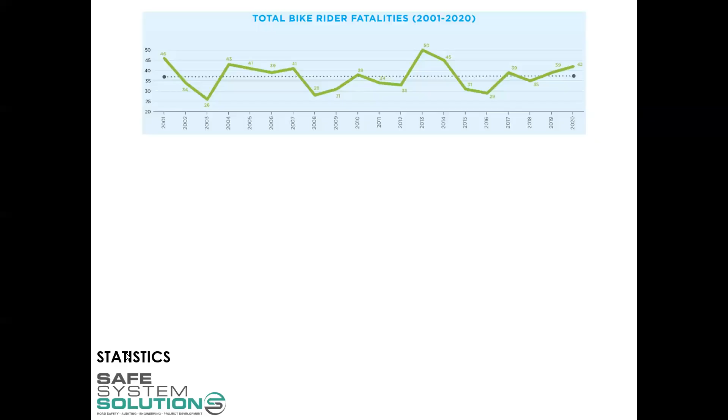Level of trauma. Thank you, Marissa. I'll just open up all of these.

So total cyclist fatalities in any given year. You can see it has been kind of up and down over the years, but more or less it's quite a solid, stagnant trend line there. We're not really seeing a decrease in the level of cyclist fatalities. Whereas if you look at our general road trauma, transport trauma in vehicles, we are seeing a decrease there. However, that's not extended to the cyclists. So that's one interesting takeaway. Oh yeah, I suppose that's kind of reiterated in that point there.

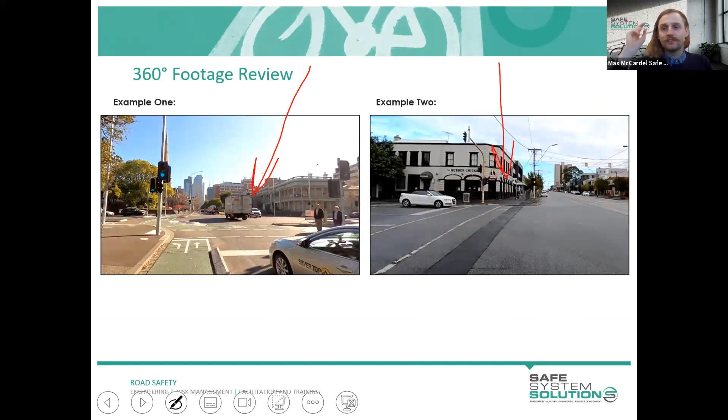Today's focus is all about roundabouts. So previously we just discussed intersections and we could have put roundabouts within the intersections, but thought it merited its own topic, so its own module. So today's discussion will all be about that. I should also make mention there's no Wally today. So if you're looking out for the wombat, there's no wombat today because we have another assignment instead of a quiz. For those who've already reviewed the footage from the previous module, we had the protected intersection there versus just a traditional signalized intersection. So encourage you to have a look if you haven't already done so.

Similar to last module's content, we will be going through protected roundabouts, having a chat about what that means, looking at some international examples, as well as Melbourne's protected roundabout. We'll go into the topic of multi-lane roundabouts and how to manage conflicts in those environments, as well as local network settings and implementing sharrows.

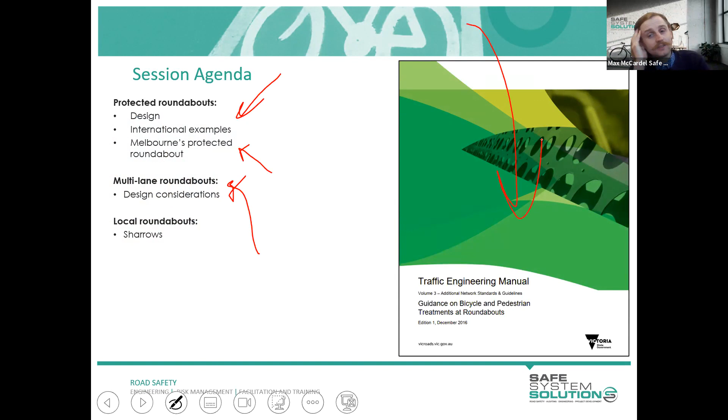The Victorian government released this document many years ago, but there's still lots of good content in there. Guidance on bicycle and pedestrian treatments at roundabouts. And also another really useful reference is the Austroads report, Bicycle Safety at Roundabouts. In my mind at least, whenever there's a really critical issue emerging or apparent, Austroads will release a report on that specific topic. So rather than just say cyclist safety in urban environments, it's cyclist safety at roundabouts, which I think speaks volumes to the risk level that occurs at these intersections. As always, please feel free to pop any questions in the chat.

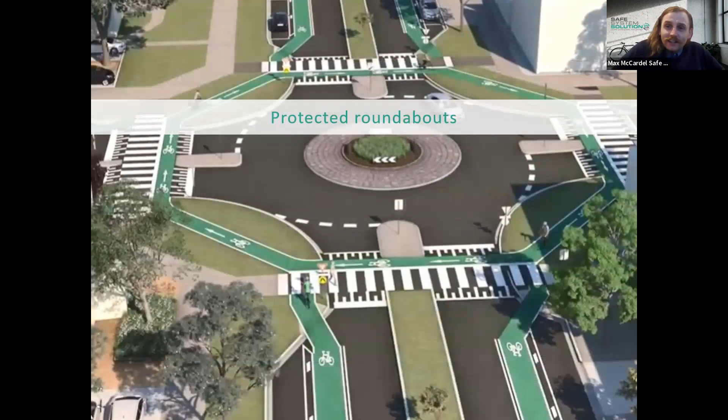Otherwise, I'll just keep chatting all day, but we will get stuck into a protected roundabout. This is an artistic rendition of what one looks like. This has since been constructed. This is in Moray Street, which we'll have a look at in more detail. But the thing you'll notice is, similar to our protected intersections, we've got an offset from where the left turning traffic is and where cyclists are crossing. So once again, you've opened up sight lines.

But traditionally, the way these roundabouts are constructed is we'd have cyclists entering the circulating area. And then they're either forced to claim the lane and sit in the middle, or there are designs out there which put them right on the periphery of a roundabout, which is a very bad outcome, not something that we want to be encouraging. If they are in the periphery, they become incredibly difficult to see, and there's just a really awkward confusion as to who gives who right of way. If a motorist is coming through and wants to exit here, there's that conflict, but does the cyclist slow down to give way to the exiting vehicle, or does the vehicle have to give way? So we don't like that peripheral design. But the protected roundabout is providing an off-road facility.

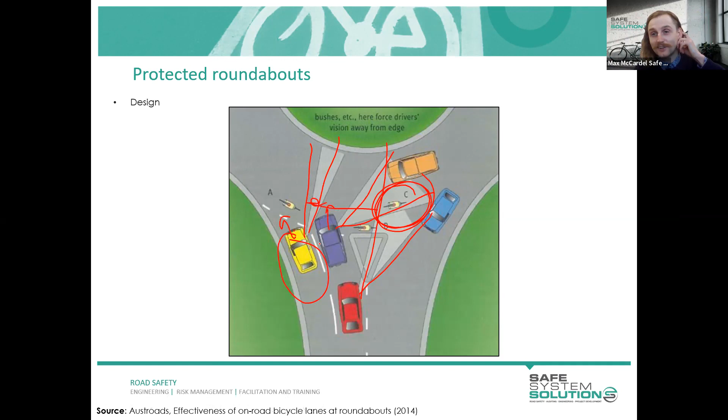So I would tend to agree that's a cyclist at risk, but I wouldn't discount any of those options because C at this point in time is completely hidden for the yellow vehicle. So it would be possible that the purple vehicle, as it's already heading out, the yellow vehicle assumes it's good to go and heads out as well, which means there's the collision waiting for that. So I have all these lines that are now occurring everywhere.

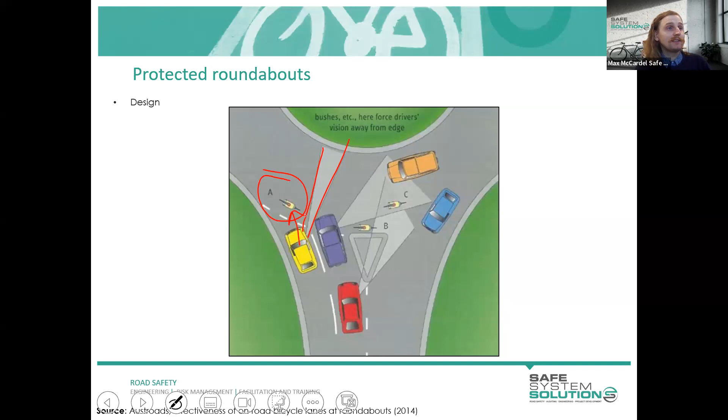Similarly, as I mentioned, this yellow vehicle, they're really focused to the right of them. They're worried about other vehicles already circulating in the roundabout. And it's possible for them to just head straight into the roundabout and not give way at all, so not necessarily focus on what's in front of them. So bit of a trick question, because I think all of the cyclists are at risk. So give yourself a pat on the back if you answered. I think they're all relevant responses.

I'll go back to the previous slide, just have a chat about give way marking at the exit points. And yes, you can kind of see the back of it there. There's give way, and there's also the symbolic pedestrian legs as well, just to further emphasize to motorists leaving that this is a pedestrian cyclist priority crossing. Good question.

All right. When we look at the actual crash types that are occurring within roundabouts, we find the most predominant crash type is an entering motor vehicle versus a cyclist that's already within the roundabout. So in this little diagram, the dotted green is a cyclist and the red is the vehicle. So it's basically this idea of a motorist coming up and giving way. They're stopped. Generally, the psychology behind it is when we are at a roundabout, we're looking for other cars, other vehicles, right?

We're not trained to look for the much smaller cyclist that may be traveling there. So that's another thing. It's this whole issue of looking but not seeing and not really appreciating what's really happening, because our eyes are just trained on the much larger metal body that is usually our biggest concern. So we have to make a conscious effort to actually look for cyclists, which can lead to these crashes 68% of the time. That's the crash type that's occurring.

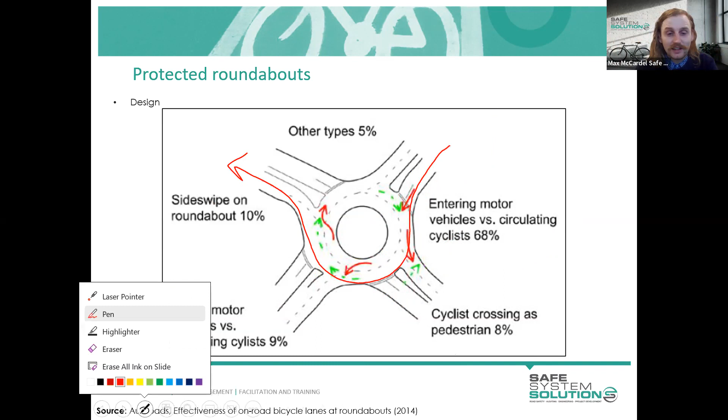analyzed. I say this because if you are a cyclist, get rid of some of these drawings, but if you are heading around and you want to just travel, let's say you want to do a right turn like this, and similar to that issue that I mentioned before, if a vehicle wants to follow you but hop off at this point, this conflict here is incredibly confusing as to who has priority.

Vehicles may assume that it's their network and they get right of way all the time, but it could also be an assumption of whoever gets there first. It's just a really awkward spot. And if you also couple that with the motorist kind of needs to make that decision about this point in time, which means they need to look over their shoulder to be able to see the cyclist behind them. And it's a very, very uncomfortable situation.

So I'm surprised to see that that's only 9%, but I think it's possible that this study was limited to single lane roundabouts and didn't focus on multi-lane. It also could just be the lack of reporting, and perhaps the crashes were not correctly classified from the start.

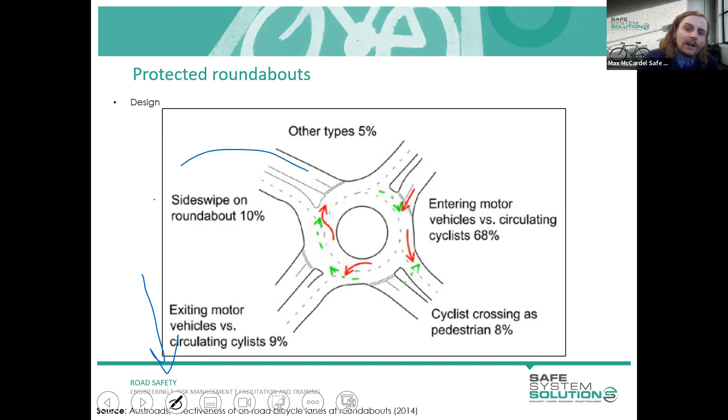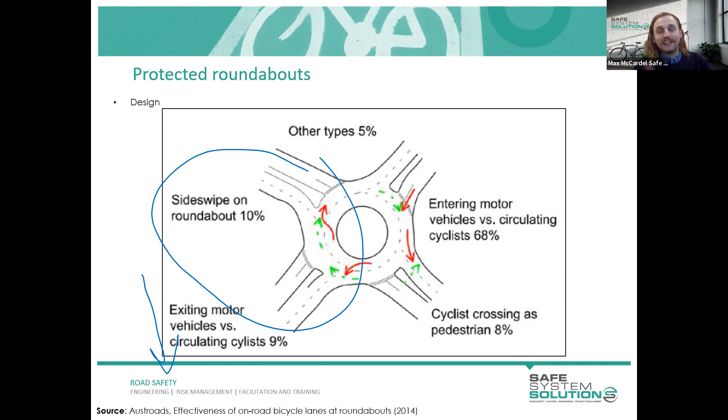The other one is just side swipe crashes within the roundabout itself. So other vehicles losing their lane, just hopping into the wrong lane by accident, things like that, moving across into the bicycle lane, causing a collision. Lots of different ways a collision can occur within roundabouts.

And generally, it's kind of understood that roundabouts do have a wonderful road safety benefit to general traffic. That does not extend to pedestrians and cyclists. So whilst it does work for some portion of the road user community, generally not as favourable for pedestrians and cyclists.

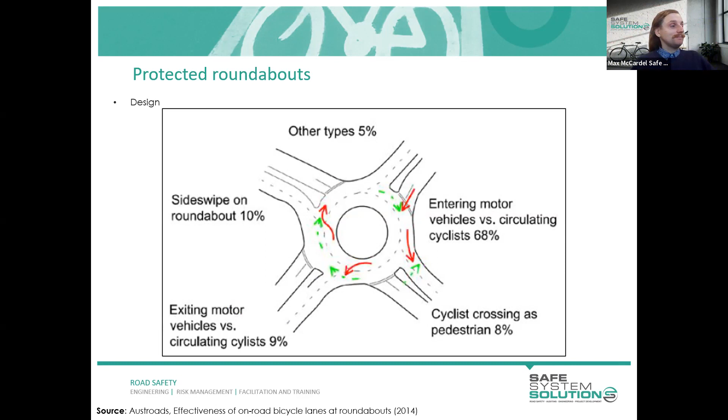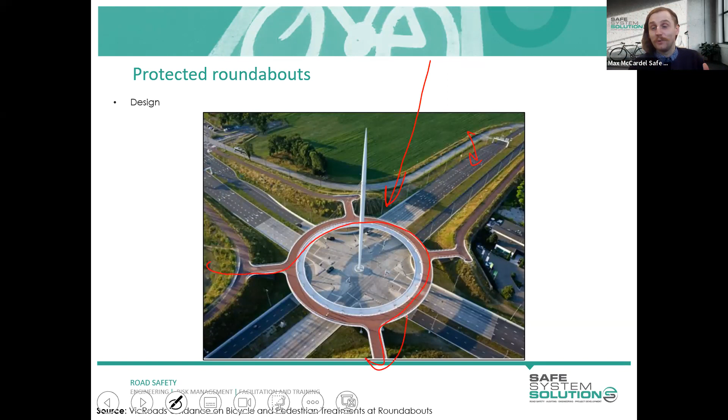So wonderful example. It's not a protected roundabout though. You just call that grade separation. Just something I wanted to show in case no one had seen that before. It's a really, really cool infrastructure treatment.

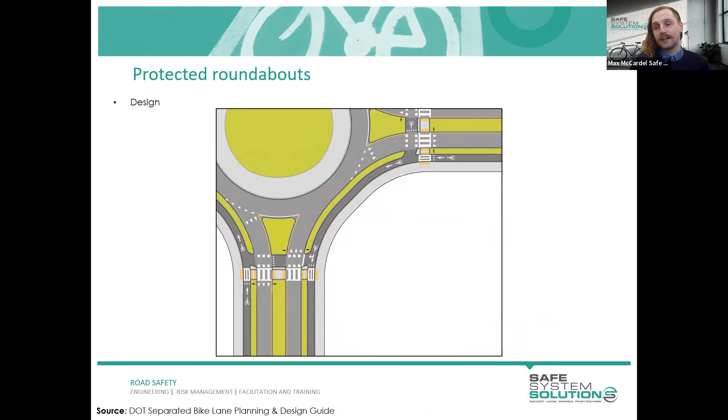A protected roundabout more looks like this, where, as mentioned before, we don't want to be encouraging cyclists to enter the circulating area. Instead, we provide a path that is off the road, separated from the road. So vehicles are traveling here, cyclists are traveling here, two separate traffic streams. Where they do cross over, it's best practice to make that a raised facility. So you are slowing down your vehicles and you're also providing priority to your vulnerable road users, which is your

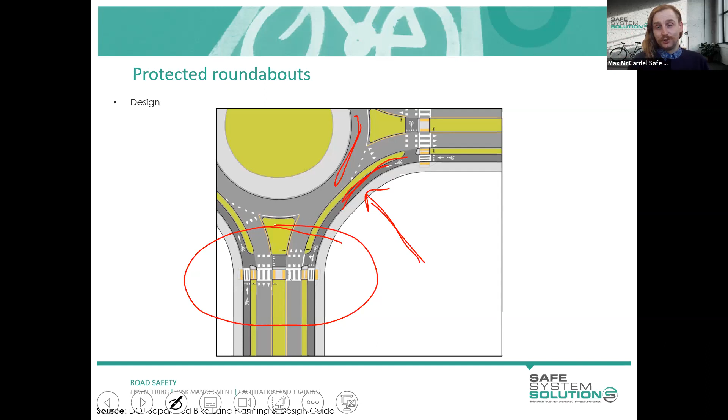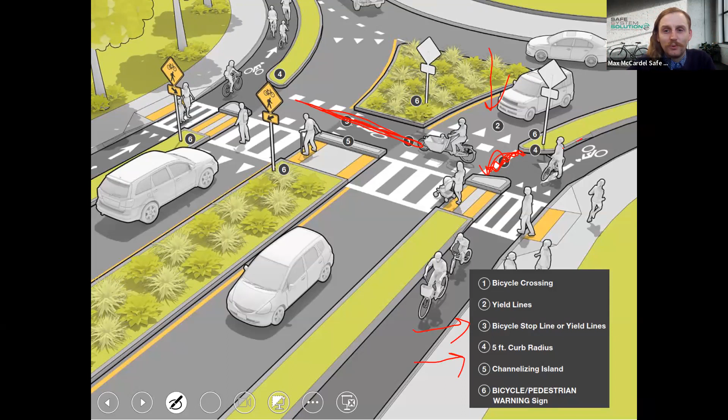We've got these yield lines or give way lines. Ours would look different within our jurisdictions, but just this idea that we need to show to traffic that they have to slow down and give way. Number 3, bicycle stop or yield lines. Yeah, this one is not applicable. This one is just confusing, so don't worry about that. Number 4, curb radius, just trying to get a nice sweeping bend for cyclists so they continue their journey.

Not incredibly relevant. Number 5, also not incredibly relevant. Channelizing, just providing some separation between pedestrians and cyclists. The risk of putting something like that in is you've just introduced a tripping hazard, or cyclists may run into that. So I wouldn't see that as a critical aspect of it. And finally, just some warning signs or give way signage in particular.

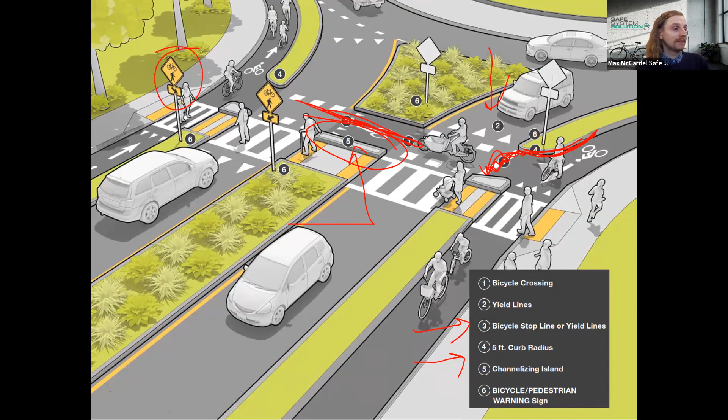There's a few different design approaches you could take with designing a protected roundabout. The first one I'm going to use is in Assen in the Netherlands, and this involves quite a significant footprint, as I'm sure you can see. But it's got all of those design features that we've just talked about.

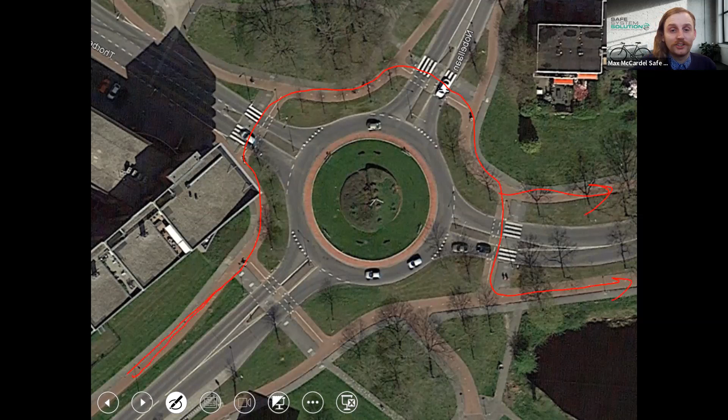So if I am a cyclist on the bottom left here and I wanted to turn right, there's actually two ways I can do this. I could go along here, like this, and continue my journey there, or on that side if that's where I wanted it. This is actually also bi-directional, so I could also do this, which obviously shortens my journey quite a bit. So that's pretty exciting.

But you'll see the reason that we're so encouraging of this type of design is we're not bringing cyclists into the circulating area. They have their own space completely. Whereas if this was the movement of a vehicle, they'd be forced to slow and give way to pedestrians and cyclists before they enter the roundabout, where again they slow and give way to any other motorists that may be within that roundabout. And then upon exit, they have to slow and give way one more time to any pedestrians and cyclists before completing their journey.

So already I can hear some of you who have worked with congestion or level of service for different transport modes understand that this slowing and stopping for general traffic could have implications for their expectations of the route. And I think that is completely valid. If you were implementing these treatments, you would see poorer performance for general traffic, as they will have to slow more often and give way to pedestrians and cyclists.

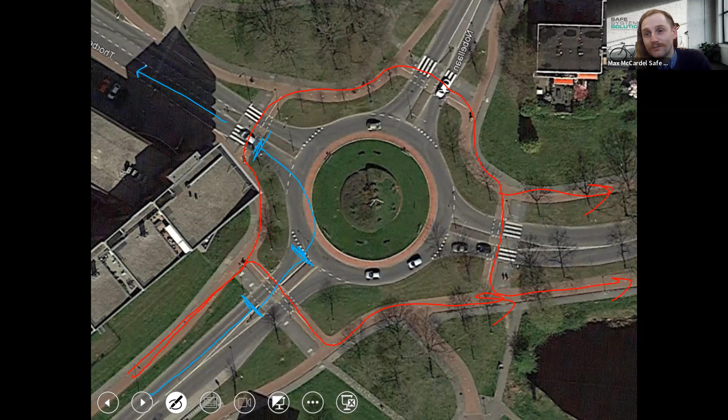But once again, if we are implementing treatments on our strategic cycling networks or our principal bike networks, the most significantly important routes within our network for the cycling community, we can't then let them down at the roundabout and just say that's a weak spot, you have to deal with it, because we won't be able to attract more and more people onto bicycles. Lots of people identify roundabouts as their least favorite part of cycling. They don't feel comfortable claiming the lane, or merging in with or being around traffic. So we need to keep in mind, if the objective is cycling safety, then that can come at the disadvantage of other road users like general traffic.

Here's how things look out on the ground. So as I mentioned, this is a type of design where you had quite a large footprint and you were able to provide quite an offset between your crossing points and the circulating area.

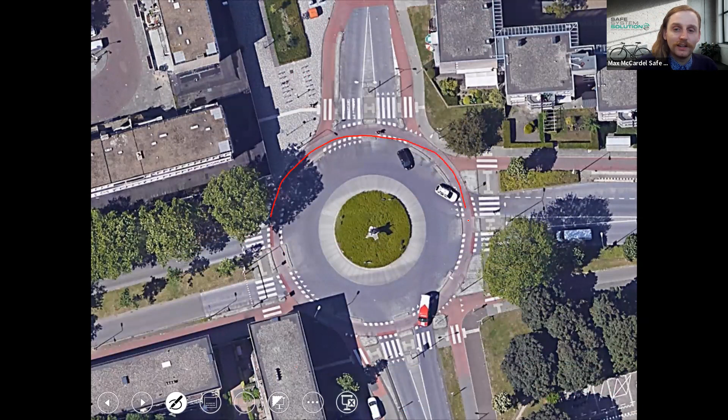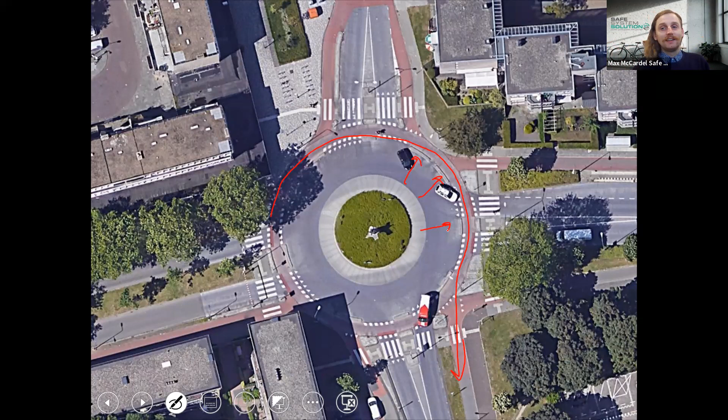I think it might show how it looks out on the ground, so you've got a bit of appreciation. And I might even bring in a vehicle so we can see how things will look. Here's our little Porsche driver coming in. I'm not sure why I picked the Porsche, I've got nothing against Porsches, but say this Porsche wanted to exit the roundabout, head out here.

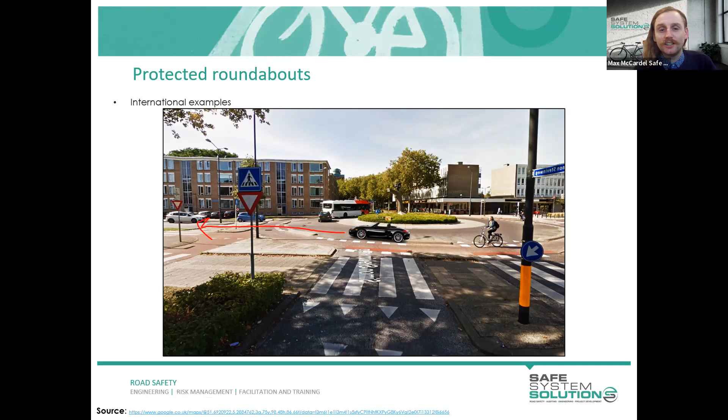Because we don't have the same offset that we had in the previous design, it's actually very difficult for that driver to see the cyclist that's behind them, because this cyclist is also traveling in this motion, and perhaps they want to travel over there. So it's difficult for that driver to safely acknowledge the presence of any cyclists and stop and give way for them. So where it gets tighter and tighter to the periphery of the roundabout, you're increasing the risk of drivers being unable to see cyclists and therefore increasing the risk of collision.

Any questions there, Marissa?

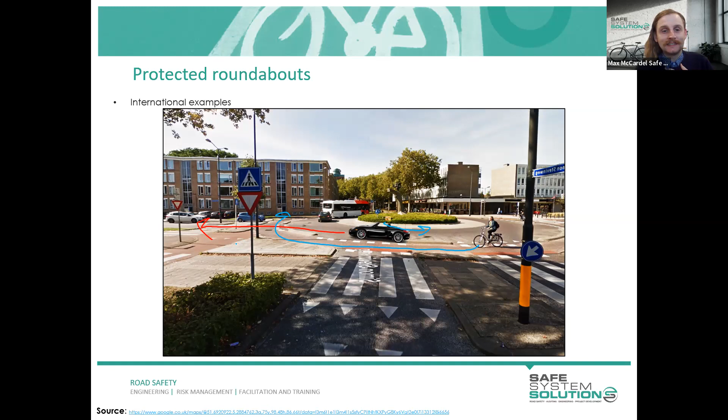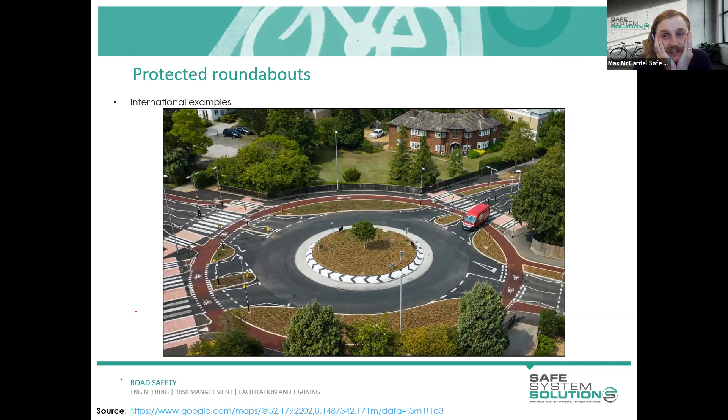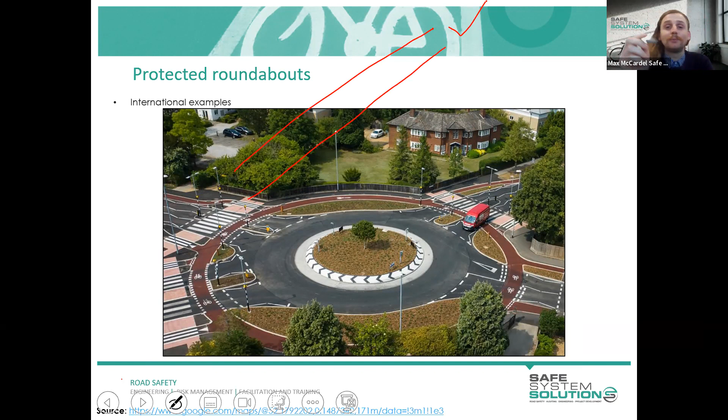We do have a question, Max. What if there is an SCC intersecting with a priority traffic route or priority bus route? Ooh, okay. So that's a perfect example where you have competing demands. If you were just looking at the SCC, the Strategic Cycling Corridor, you'd say, yeah, I can do gold standard along there because that's the strategic objective of that corridor. And we recognize that at a local level, at a state level, it's really important to get cyclists traveling through there safely and make it as attractive as possible. But that could be crossing over an arterial road where it's really important for people and heavy vehicles to move through.

Depending on the size and capacity of that movement corridor, you could be looking at grade separation. I would say that would be a really good outcome for cyclists. In our jurisdictions grade separation is few and far between, but in these European nations that I keep showing, that's exactly what they would do. There's no question about it. They would never accept the risk of cyclists crossing these major arterials. Even with signalized intersections, they'd be much more likely just to provide grade separation. But it needs to be considered case by case. I can't provide a blanket response because you can't build overpasses at every single intersection either. So it's a good question.

Keep them coming. Thanks, Max. And just further to that, do you support separation in those situations? Depending on how it's been designed, yes, I think it can work, but if it's not going to be comfortable for the cyclist community to use, then they won't use it. They'll find ways around it. They'll go whatever is more attractive for them. So think of things like steep grades and the facility itself, whether there's enough width, whether the handrails are going to create snagging risks and things like that.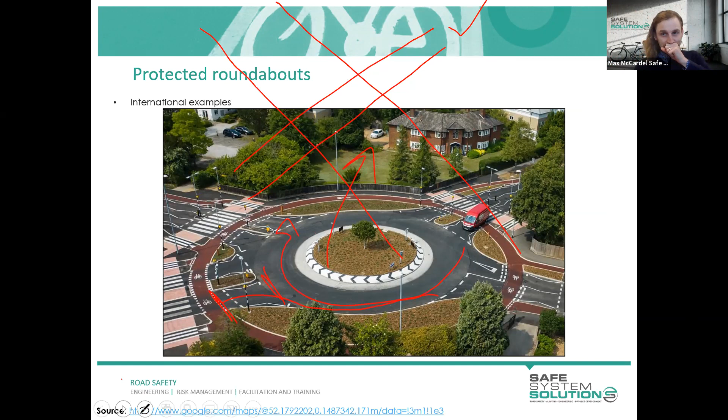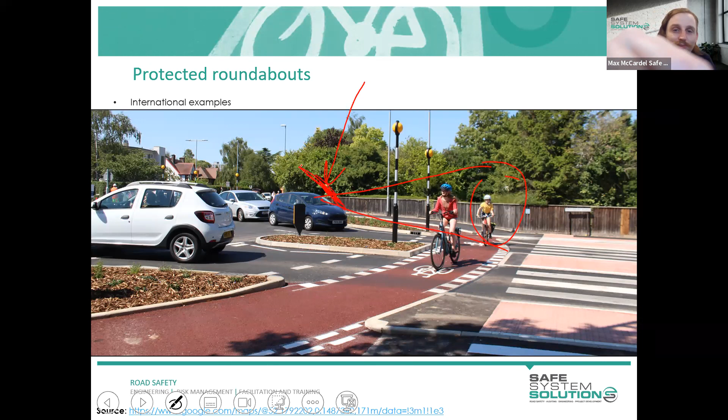It's actually perfectly illustrated in this diagram here, but you can see in that photo, hopefully that's a bit clearer, how the driver would be in a much better position to see cyclists crossing over in front of them, as opposed to if the cyclist was creeping up right behind them in that awkward position. So the bigger the offset you can apply there, the more positive the outcome will likely be.

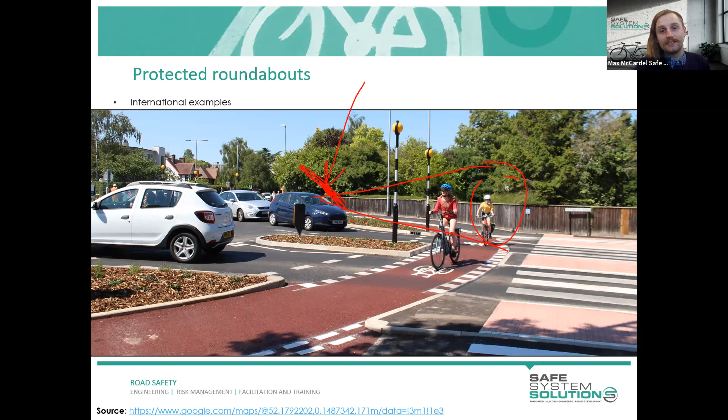I should also caveat that with, if you push the offset too far away, two things might happen. You might get cyclists that don't want to travel that extra distance to then cross over, so cyclists may pick their own path. The other thing is, if you put the crossing point too far away, as motorists exit, they build up speed, and they'll be less likely to then slow and give way again for crossing pedestrians. So there really is a bit of a mix and match of exactly the perfect length that you would be aiming for. Don't want it too close, don't want it too far.

Generally, one parked vehicle is being considered what should be strived for, so like 6 meters or something like that. But yeah, just something else to consider.

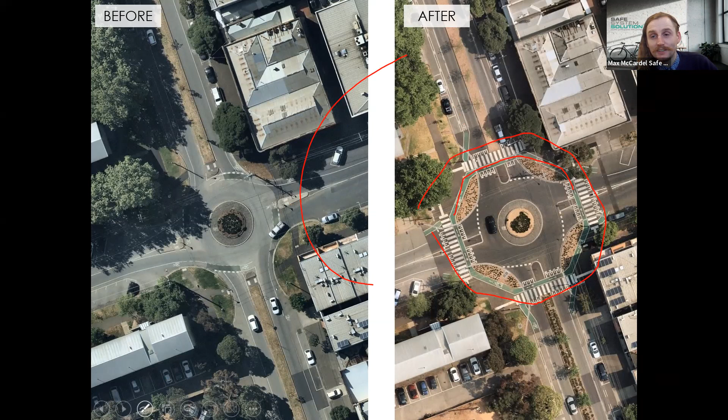Some people don't like the shape as a cyclist because you've got these sharp-ish bends where, if you are a cyclist, you do like sweeping bends just to be able to maintain speed. Personally, not that big of a deal. I think it's fine. It's not like you have to slow down to a walking pace to be able to navigate that, but you do have to slow down, which I don't think is necessarily a bad thing. I might just go to the next slide because it's a bigger picture.

The other interesting thing about this site that I mentioned in the protected intersections as well is whenever the cycle path crosses over the ped path, you can see the zebra crossing is extended. Yeah, that one's under the tree. So in other words, if you're a pedestrian coming along, your priority starts at the bicycle path. So cyclists are forced to slow and give way to you. And once again, just to reiterate, it's a lot easier to communicate that to road users than to have it the other way around of pedestrians needing to give way to cyclists within this area. So I think that's a really sensible idea.

Really good feature within this design, not shown in the others, is the raised nature of the crossing points as well. So building wombat crossings. The raised feature slows down vehicles, so it ensures that they are traveling at speeds where they're more likely to be able to stop for emergencies if someone does cross in front of them. And also, if a collision were to occur, it's much more likely that the severity of that crash outcome would be survivable. So making them raised is just another really well thought out, Safe System aligned feature as well.

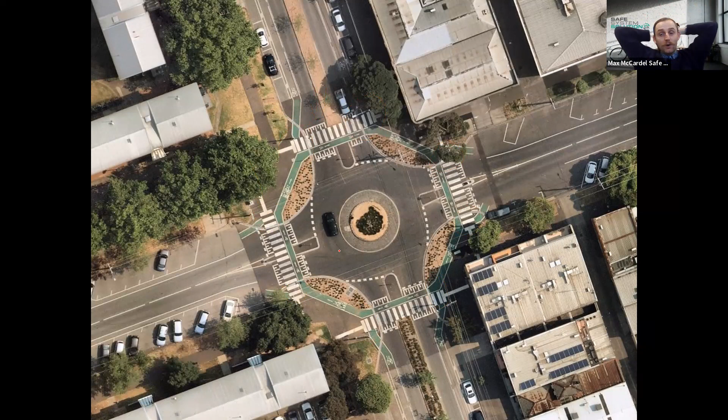I did have a question for the group about this one, which is, could you think of any disadvantages for cyclists at this particular roundabout, or at the other roundabouts as well? But because I've got this photo up, I'll just talk to this one. Any disadvantages? So I've talked about all the wonderful safety benefits. So maybe this one isn't safety related, but could you think of any disadvantages for a cyclist at the roundabout?

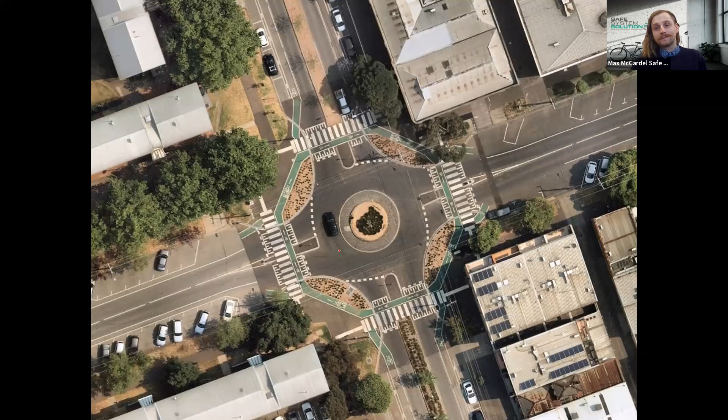We have a couple comments, Max, while people are popping in their answers there. Noticed a lot less vehicular movement. Oh, it's a tongue twister, that one. As opposed to bikes and pedestrians on the video that you showed there. Yeah, true. And Chris says they go to the trouble of building a nice roundabout but leave a dooring risk on the approaches. Yeah, that's right. Dooring. Not reverse dooring, but reversing out into a bicycle lane. That's very risky as well. But yeah, very relevant.

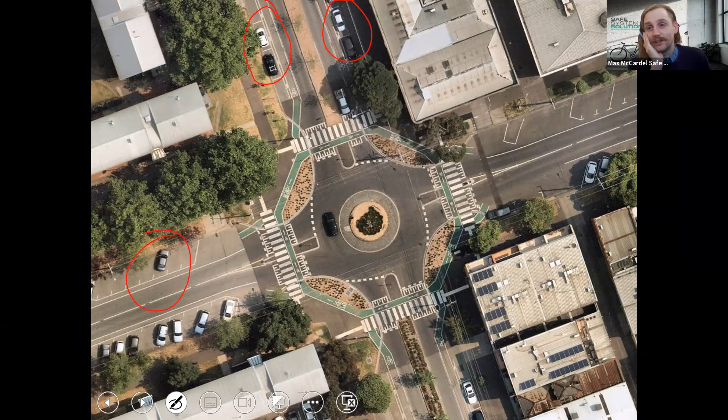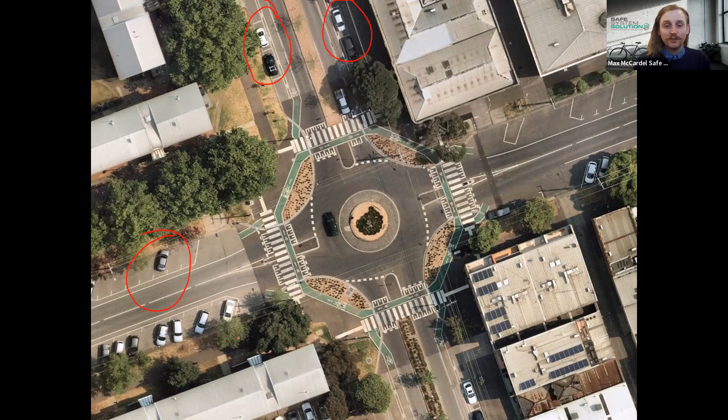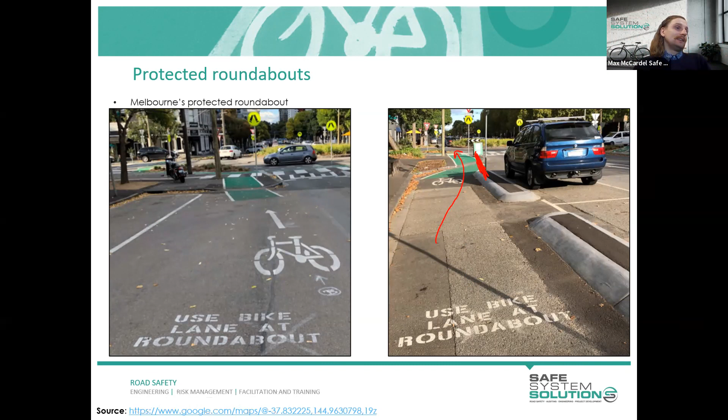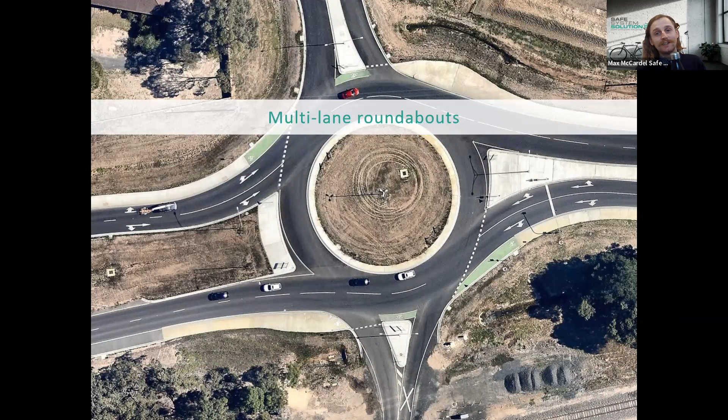All right, multi-lane roundabouts. Things get a little bit trickier in these environments. I'll move that little banner out of the way. This is in a rural environment. It's coming into a relatively big township. And as you can see, the main thoroughfare, which is east-west, has got bicycle lanes, but nothing for the north-south legs. So there's no north-south connection there.

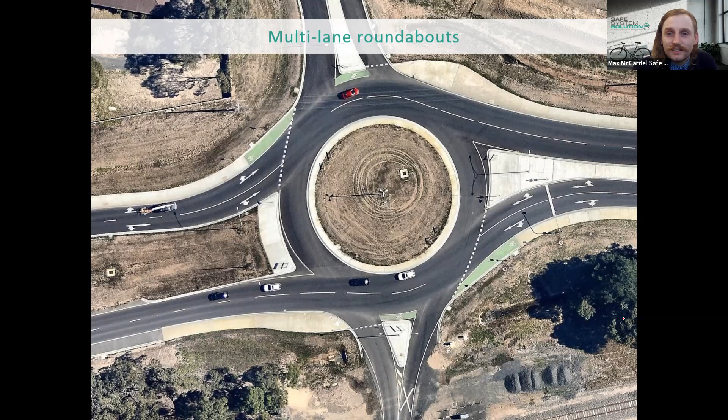The original idea with this roundabout was if you did want to turn right, they provided this space off-road here to be able to pause and wait and then cross over. However, it wasn't fully realized as there's no curb ramps there. So that's all just splitter islands. So you'd have to actually mount the curb again, which is obviously not a great outcome.

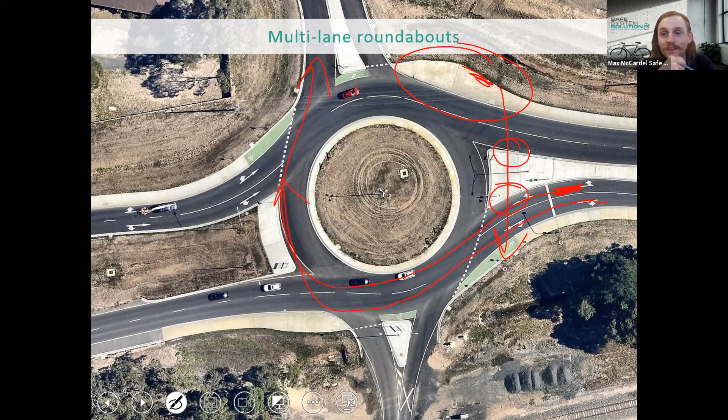So it's really not encouraging cyclists to turn right at all, which means cyclists that do want to perform that may be forced to put themselves in this position here and get in the right lane and travel like a vehicle in this high-speed environment, or in a much worse outcome, use the periphery and cut across that way, which would be, as you could imagine, quite a stressful thing to be doing as a cyclist. So this is not a very good example of what to do in multi-lane roundabouts.

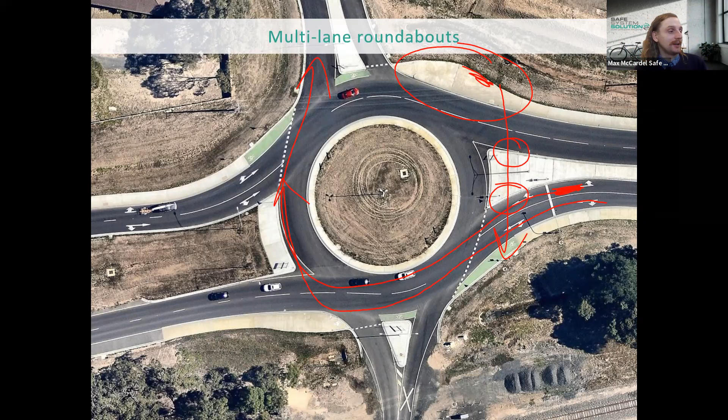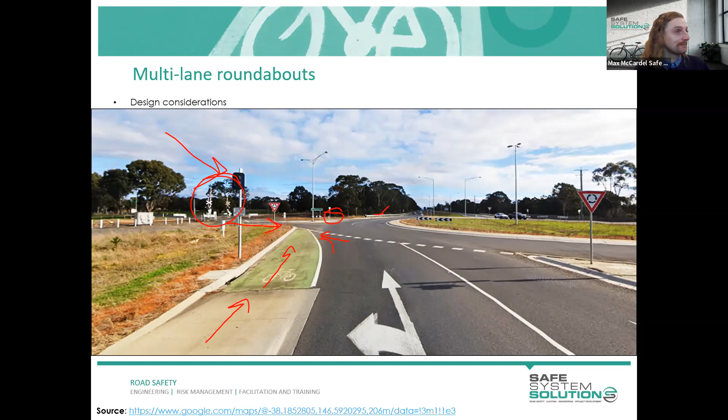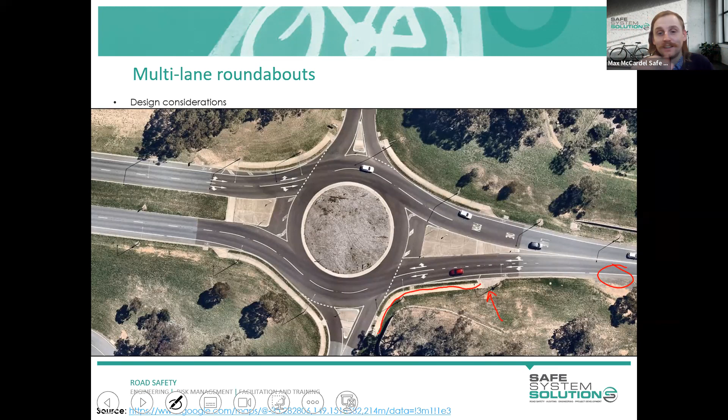There's some hold rails and things like that. They don't have priority to cross here. They have to wait, give way to traffic, cross over. And if they wanted to do that again, they could cross over here and then continue their journey up there. But this idea of physical separation in multi-lane roundabouts is absolutely key. It's critical. It's a must.

So in the local environments, we're a little bit more flexible. We can even have cyclists riding in the middle of a roundabout through the use of sharrows and encourage them into the circulating area. But for multi-lane roundabouts with higher speeds, it's not a feasible solution. We really want to be providing these off-road facilities.

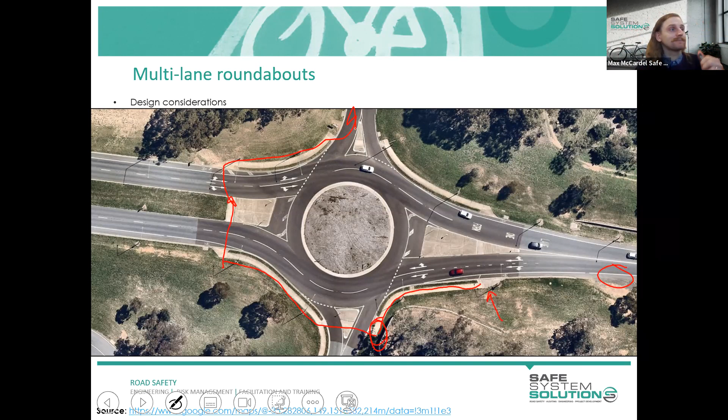Here's how this looks out on the ground. So you can see cyclists, once again, you could interpret that as being corralled into that off-road facility, but it doesn't necessarily exclude a cyclist who does feel more comfortable to claim the lane and head right.

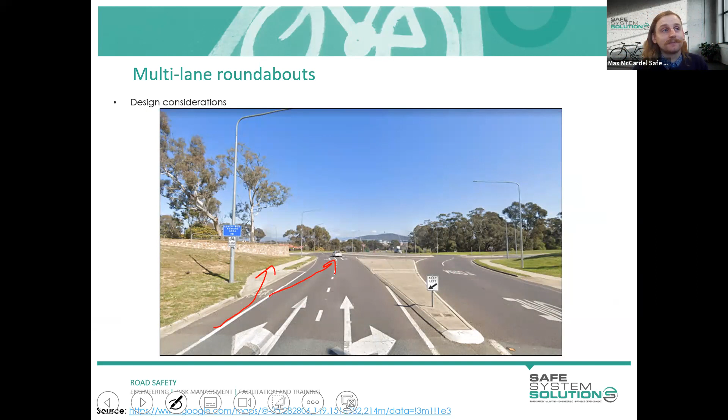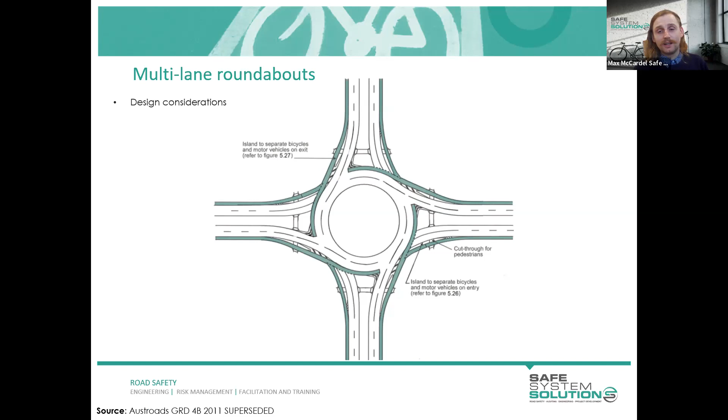For those that have worked within this space, you may have come across these designs before, which propose to put a bicycle lane on the periphery, something that I've been saying not to do this whole time, and that has been superseded. So if you are still referring to that, make sure you're going to the Austroads Guides, Road Design Part 4B, and having a look at what they currently recommend, because what they're currently recommending is let's get cyclists off-road and provide the hold rails, and they can cross when they have the time to do so.

Here's an example of how a design may be influenced by the network that you are crossing. So in this example, the east-west road is, let's just say, a highway. It's quite a high movement corridor. It's quite important. Whereas the north-south is more local. Could just be residential access or access to developer land kind of thing. So they're all off-road facilities for cycling, but I want to focus on the actual crossing points.

So we have a look at the northern side. We acknowledge this is a local network and the movement of vehicles is not really that important at a strategic level, so at a statewide level. So what we're going to do is provide priority to cyclists. So if you are a vehicle that's turning left into this development, you have to slow down, give way to cyclists and pedestrians, and then continue on your way. Similarly, if you're exiting.

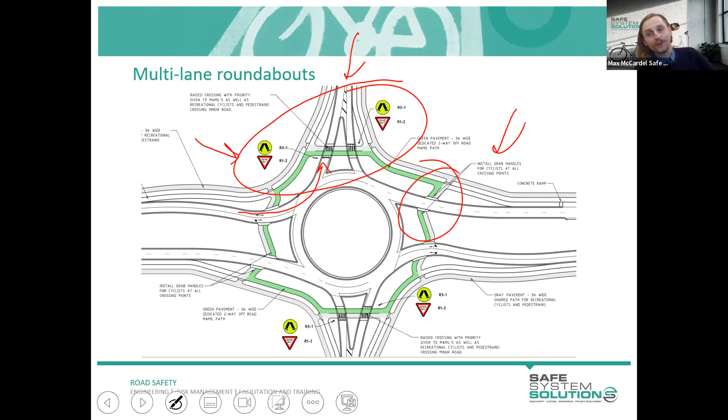That design approach has changed for the much more important highway. It's much more important to keep general traffic movement here. So instead, we're going to install grab rails or hold rails for cyclists at all crossing points. So we're still maintaining the priority for general traffic on that movement function corridor and making cyclists give way. So it's an example of where your design may be dependent on what the road network strategic objectives are for each of the corridors that you're crossing over. Pretty neat little example.

Lots of great answers coming through there, Max. Thank you, Marissa. Yes. All right, let's have a look.

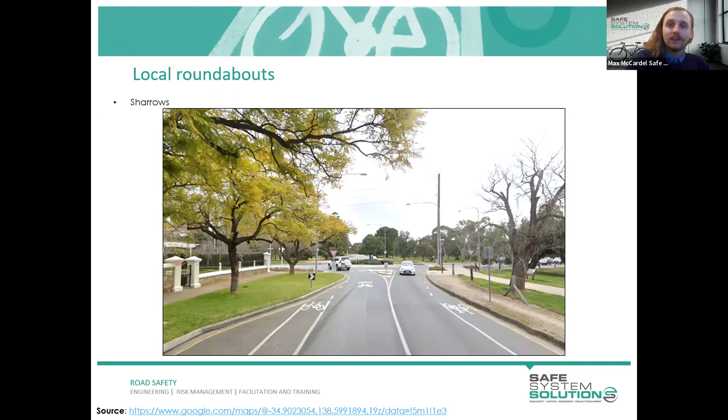So here's an example of how the sharrows could be implemented in these local environments. As you remember before, when we are mixing traffic, we want to be in the 30 to 40 kilometre per hour range. So in a lot of our networks where we have these, we may be looking at reducing our speeds just to accommodate cyclists safely claiming the traffic lane, which I'm not against. I think that would be a good outcome for cyclists and general road users as well.

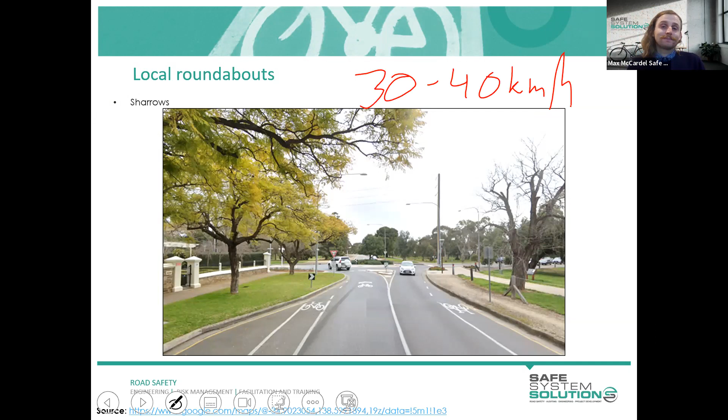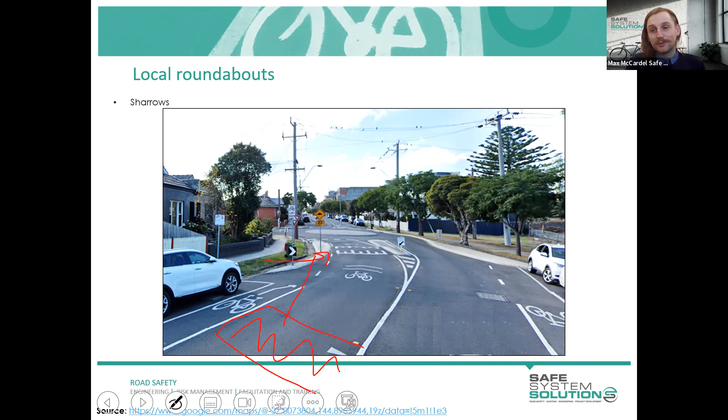So the sharrows are used quite commonly, depending on what jurisdiction you are in. This particular example I wanted to share because I think it's much better practice if we are to install vertical deflection for the speed hump. If we can move that back to before the merge point, so vehicles come up, they hit the speed hump, they slow down, and then cyclists are merging in front of them, much, much better outcome, as opposed to cyclists just merging and then everyone has to slow down.

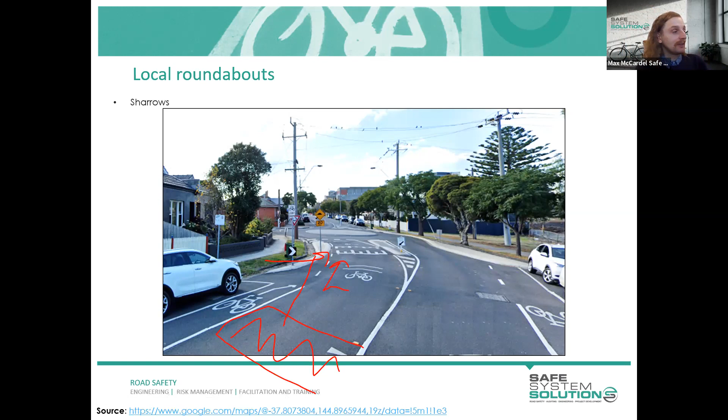Because you don't really need the cyclists to be slowing down at that point. They're likely already traveling at lower speeds approaching the roundabout. So that would be something to take on board if you are working within local area or local governments. Another similar example of just the local area traffic management treatment being applied and lots of sharrows. But yeah, just to reiterate, low speeds, low traffic volumes. Generally, we're considering it appropriate to be installing sharrows, including within the roundabout itself.

So you can put the sharrow symbols all the way through the middle of the roundabout as well, just to really emphasize that this is an area to be shared and it's not just for general traffic. Right. That is the content for the roundabouts, but I've still got a few more slides to go through, and I also want to run through the assignment. So keep the questions coming.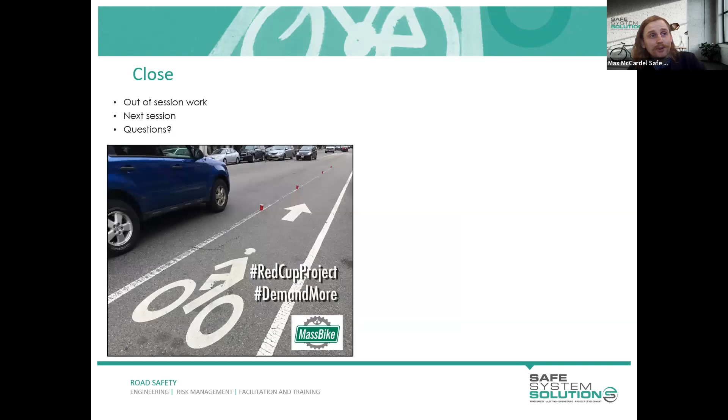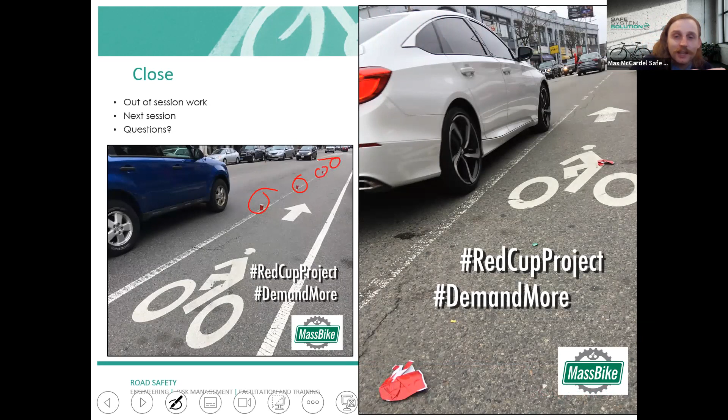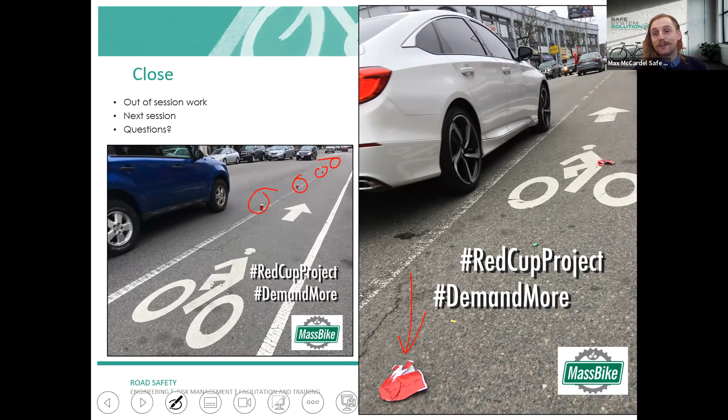Obviously, that one's not funny, but the Red Cup project was something that was trending a few years ago on Twitter. That's where people placed red cups at the edge of their bicycle lane and then came back a couple hours later to see how their red cups were faring. And invariably, it did not take long to see that they had been crushed and destroyed. Some people also put tomatoes and apples in their cups just to really indicate how vulnerable cyclists are if you are just providing a little white line to protect them. It's incredibly common to see vehicles using that space as their traffic lane, which is very uncomfortable for cyclists and also has safety implications. So quite an interesting campaign.

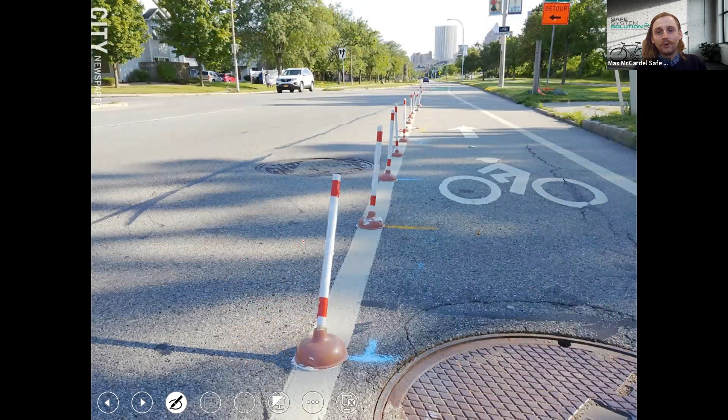Another one that I love to share is this fellow in New York who was trying to bargain with their local government authority to install a protected cycle lane, but they wouldn't do it. So he just went out there and bought 50 plungers and glued them on the road, which is just amazing effort. You've got to commend that. No, actually, I shouldn't. We don't commend vandalism, but it's really taking matters into your own hands. Unfortunately, it did not work, as council did rip the plungers up and no protected bicycle lane has been installed at this location, which is a shame. So it made for a little gag, but unfortunately didn't lead to action.

This is just another advertising campaign in Scotland. Feel free to have a watch of it after today's session. See Cyclist Think Horse. This one actually caused quite a bit of upset from the general community for two reasons. One, the cyclist wasn't wearing a helmet. It's not a legal requirement within the UK to wear a helmet, but it was frowned upon regardless. The other thing was a lot of people were upset that she wasn't riding much closer to the gutter. It only lasted like 2 or 3 months on telly before this got taken off air because people were pretty upset with what they were seeing.

So there still really is quite an awkward sentiment towards cyclists sometimes, that people think cyclists want full access to the road and they want to take control of everything and things like that. But yeah, it's very much trying to get away from our car-centric cities. We've always been focused, for decades, on the 4 wheels and providing the easiest transport for them. But perhaps we need to acknowledge that that's not the best thing for our communities and certainly not for the safety of our vulnerable road users.

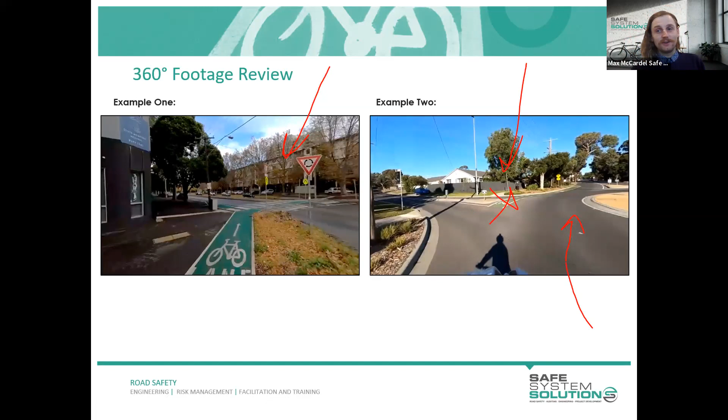I have set aside some time just to get stuck into our assignments. So on the LMS, you'll see that module 4 video that I was just talking about. You'll also see the module 4 assignment. If you click on this link here, it will take you to a Word document. The Word document will look like this.

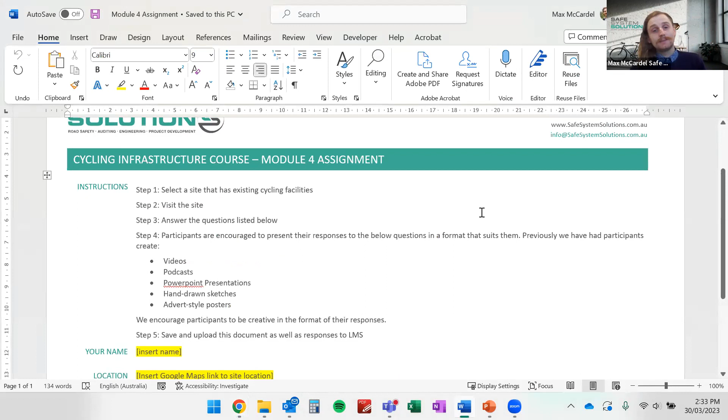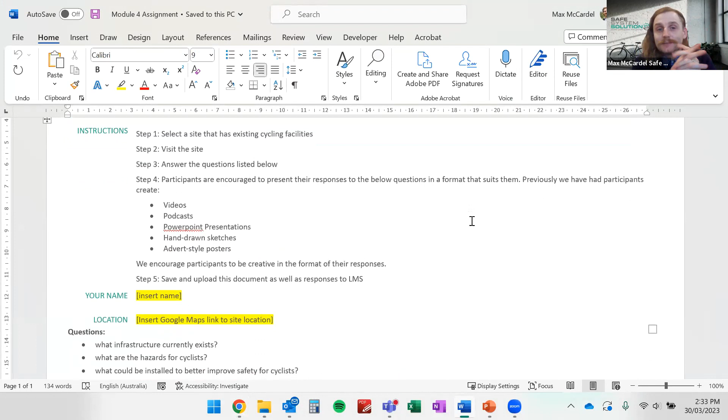The instructions for your final assignment: we require you to select a site that has existing cycling facilities. We want you to visit the site. You don't have to ride a bike on the site, but we do want you to actually be boots on the ground there. So we recommend you pick a site that is close to home, close to the office. Maybe you go and pick up the kids from soccer or whatever it is, and there happens to be a bike lane there. That's fine. Whatever is convenient for you. We just want to see you take a photo of an actual real site that you have visited. Preferably if you can do a selfie, that'd be great.

Answer the questions listed below. So we've got a few questions for you to answer. Step 4 is where things get a bit spicy. We encourage participants to provide their responses in any format that you want. If you want to design up using AutoCAD or MicroStation, this is what the existing conditions are, this is what I want to do, go for it. If you want to make a PowerPoint poster about what the conditions are and what you want to do, that's fine as well. We really just encourage a bit of innovation or a bit of creativity in this section, because we've found that some participants just love doing that.

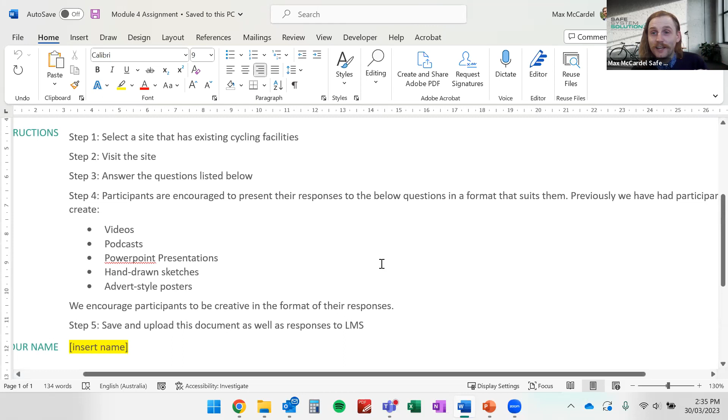Some people like the opportunity just to be able to express themselves in whichever way they can. We've had in the past people write poems, people have written songs, someone made an animation, someone put all the drawings next to each other on page after page and you flip through them. I don't know what that's called, but they did one of them. Amazing stuff. Anyway, you can do whatever you like. If you just want to write a Word document and have this completed, you're welcome to do that too. We just encourage you to do whatever feels right for you and then upload that submission to the LMS, just like you did with the Module 2 assignment.

If I scroll down, all we need from you is to insert your name and where that is located, just so we can do a quick street view and check how things look on the ground. The questions you need to answer in any form that you want: What infrastructure currently exists? And please refer back to our previous modules to make sure you're using the correct terminology. What are the hazards for the cyclists? You can be as broad as you like. You can mention your own anecdotal experience living in the area. That's fine. We just want you to capture the hazards.

And the reason I mentioned we will review things via Google Maps is because if there are hazards that we think you have missed that would have been worth mentioning, we will include that within our feedback. So if you think this can just be like, oh yeah, that's the site, that's the hazard, job done, you may be 100% correct, but we want to challenge you to start thinking, what are the hazards there as a cyclist? So try and get a better appreciation for the cyclist experience.

Final question: what could be installed to better improve safety for cyclists? I'm not going to limit you with any budget constraints, or any political constraints or anything like that. This is a bit of a carte blanche. You can build whatever you believe will improve safety for cyclists. So hopefully that makes things a little bit easier for you.

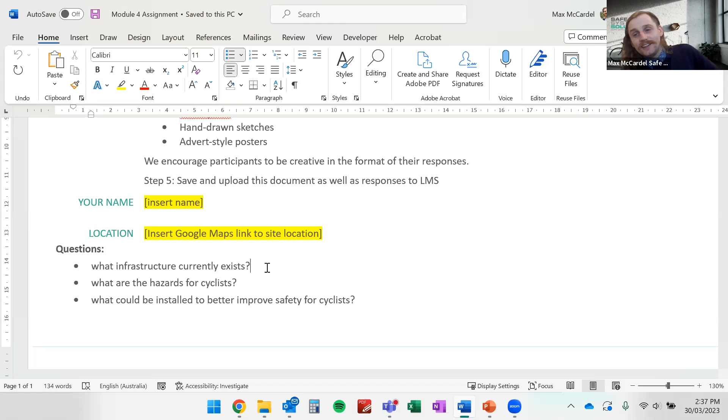The assignment, we have provided a deadline of next Thursday. So you've got opportunity, I suppose, this weekend just to sort out a site, take a photo. In terms of how long you should allocate for this assignment, I would say if this is taking any more than a couple hours, it's taking too long. So please don't spend too long on this.

We don't really require massive in-depth reports on these types of things. We just want to make sure you've understood the content that has been presented and you're able to identify the hazards and what could be recommended to improve that. So yeah, if it's taking you hours, please just get in touch and we'll try and corral you into a different path.

The other final thing I was going to mention is under resources in reference documents. Oh, this is the right one. Sorry, yeah, it is. So there's a file there called Cycling 360 Footage Examples, which I'll just open up.

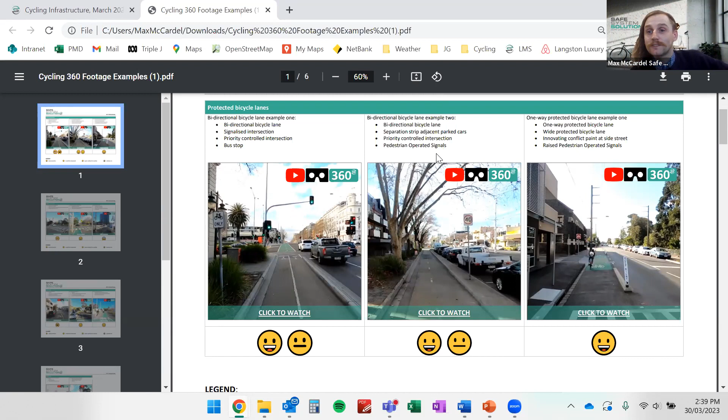We have provided this for all participants, which is basically different cycling infrastructure treatments that we've recorded using 360-degree footage. So if ever in the future you are looking at designing a protected intersection, for instance, you could have a flick at this little resource and click on it, and that will give you a bit of a reminder of what that looks like. And to make our impression of these facilities clearer, we've included a little bit of an emoji legend.

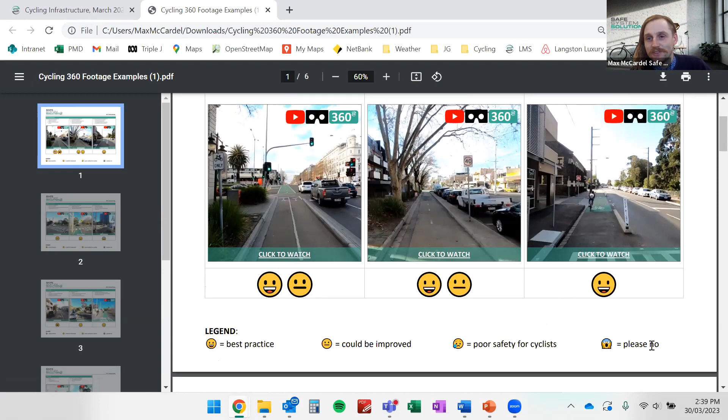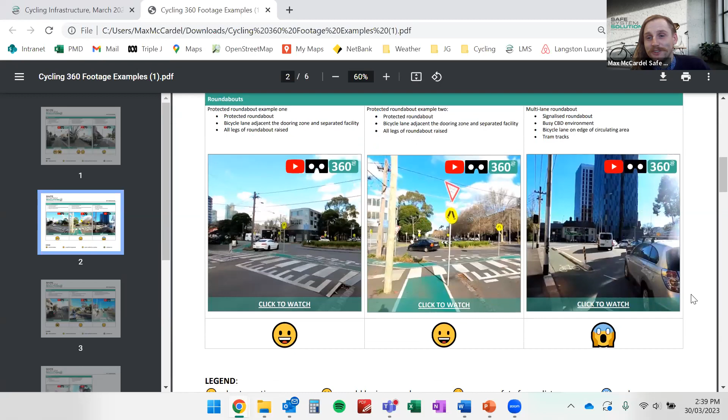So big smile is best practice, and the person screaming there with the blue face is a please don't do that. So if you're going to watch any of them, maybe just watch that one, because it's probably a reminder of what not to do, and really showcases how stressful cycling can be. But yeah, just different examples of cycling infrastructure treatments that hopefully will provide you a bit of information as you go forward and use these skills in your next project.